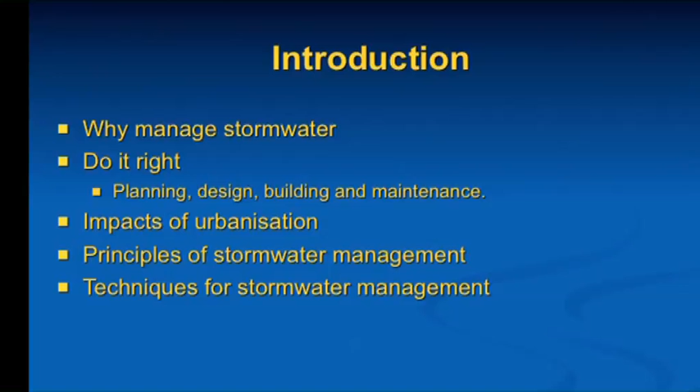Why we might want to manage stormwater, very briefly. Then a little bit about doing it right: planning, design, building and maintenance of stormwater drainage systems, stormwater management systems. In order to know what we're trying to achieve, we have to know what problems we're trying to address. So I'll talk a little bit about the impacts of urbanization, and then principles of stormwater management, and finally, what's probably of most interest to everybody is the techniques for managing stormwater. Some of them, not all of them by any means.

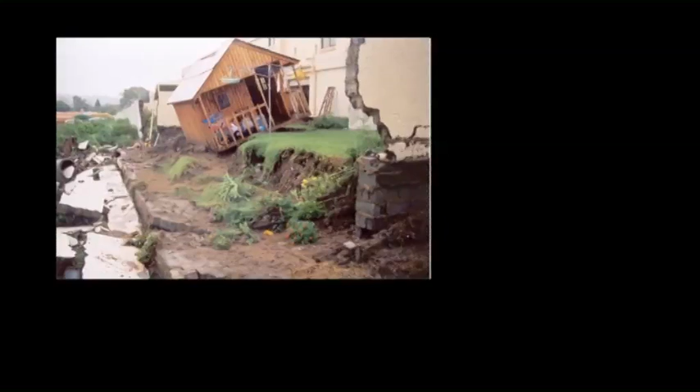All right, why might we want to manage stormwater? The obvious reasons are we want to avoid this sort of situation where the water gets out of hand and washes people's gardens and things away. This is an eroded donga just downstream of Vorna Valley. That's the Vorna Valley Spruit. It used to be a lovely rural catchment of Midrand. It's now an urban catchment of Midrand. Hence, the wetland that was up at this level no longer exists. And that's a bridge in the south of Johannesburg.

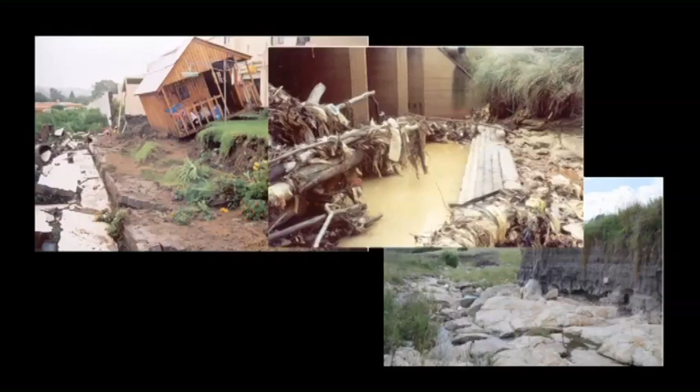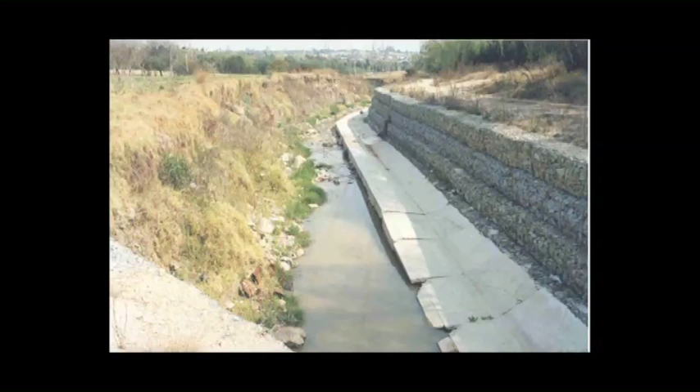Here, somebody's attempt at fixing a donga. What do you do when you have dongas to fix? You stick gabions in them. But in this instance, they stuck gabions down the one side, forgot that rivers erode on both banks, and also tried to go a bit deeper. So we have a gabion wall, a lovely little concrete channel, and the stream flows down the bottom of it. So, how was this fixed?

That's at the bottom of Sandton Drive, where Sandton Drive joins William Nicol. It was Sandton Parks. It wasn't Joburg City Parks. They planted some trees along the side so you couldn't see it from the road. And then they put a picket fence, which is now covered in bugweed, and now you definitely can't see it from the road.

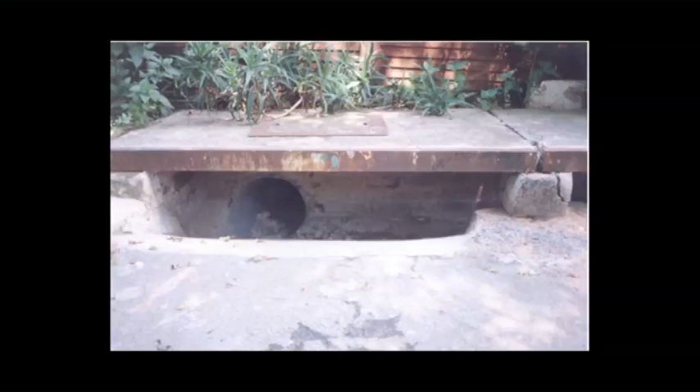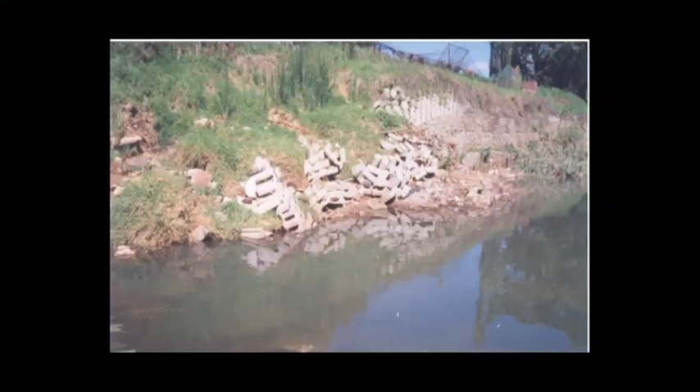And then this is a technical thing. Why do you think the person who designed this fancy outlet with this tiny little pipe at the bottom really and truly believed that it had to have such a big mouth? I'm not sure, but do it right. And if you're going to build it, also build it right and try to make sure that it stays there. You really don't want this to happen. Down on the Braamfontein Spruit below Pirates, that was a Loffelstein wall that didn't have a proper foundation, so the Loffelsteins are now going to Hartbeespoort Dam slowly.

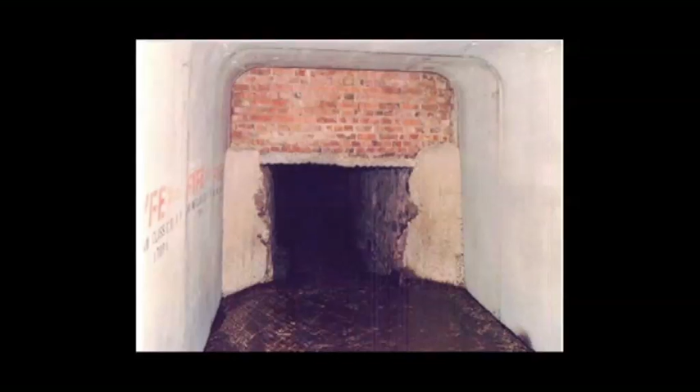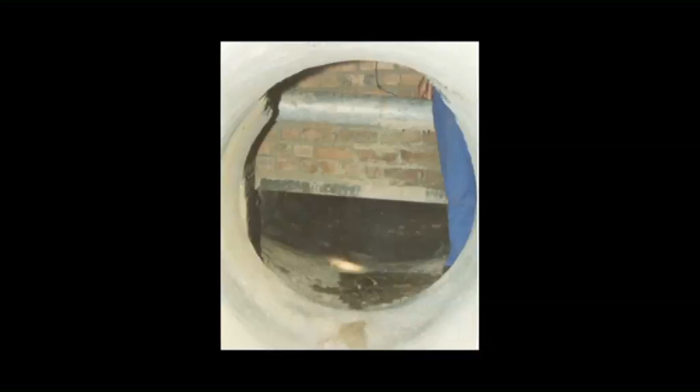This view is looking downstream in a culvert. I'll talk about where you start stormwater management and stormwater drainage facilities, but you don't actually build a great big one and then hope that the water is going to find its way into a little culvert at the bottom. It doesn't work too well. This is looking downstream in a stormwater pipe where somebody got their planning wrong, or maybe they didn't. They just came afterwards and decided they needed an electrical conduit through the stormwater drain. So we have this clean, great stormwater pipe and a box. So that pipe doesn't work too well either.

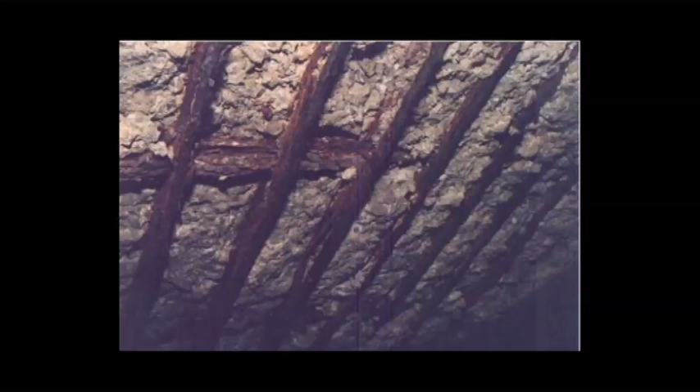If you're going to canalize rivers, you really do need to do something about maintaining them. So scour holes are not great, because they end up in bank failure and that costs maintenance. And this finally, this is quite an interesting problem.

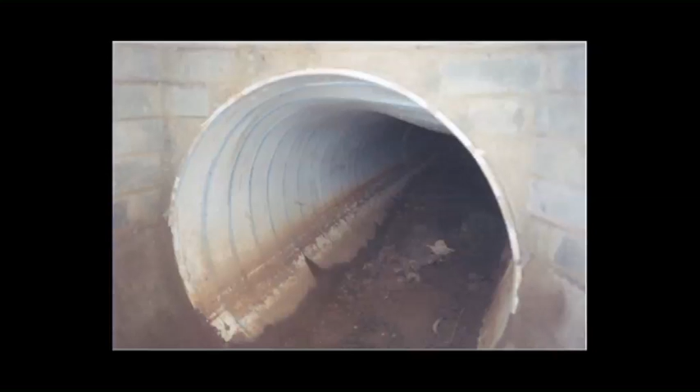That is a thin-walled plastic pipe. It's a structured walled plastic pipe. It comes in a roll, and as you want to make a pipe, you actually roll the thing out and it clips together with a little edge like that, and you end up turning your plastic strip into a pipe. But it's got an effective structural thickness of about 8 millimeters of plastic. Now, somebody took a 900 pipe and they buried it under 2 meters of soil, and they thought, because somebody told them something, it was going to work.

When I say do it right, it doesn't only mean build it right. What I mean is also manage it correctly. What happened here, the consulting engineer had designed a concrete pipe. Concrete pipes are expensive. The contractor went along to the developer and said, I've got a much cheaper plan. I can do it with this cheap plastic pipe. And the developer said, well, if it works, of course, let's do it. So the consulting engineer was overridden.

And this plastic pipe, I don't know whether you can see the top there, it's just quietly collapsing into itself. The consulting engineer was the first line of attack. You let us build this thing. Guys, everybody needs to be sensible about what they're doing. So this kind of mistake can be quite embarrassing.

But what are we trying to achieve? We're trying to manage the impacts of urbanization on stormwater, the effects that storms have on the catchment. What does urbanization really do? First of all, we know you get an increase in imperviousness. Everybody knows that. We've got roofs, we've got driveways, we've got roads, we've got parking areas, and the rainwater that hits those surfaces runs off in a hurry. Nothing goes into the ground, and we have this increase in runoff.

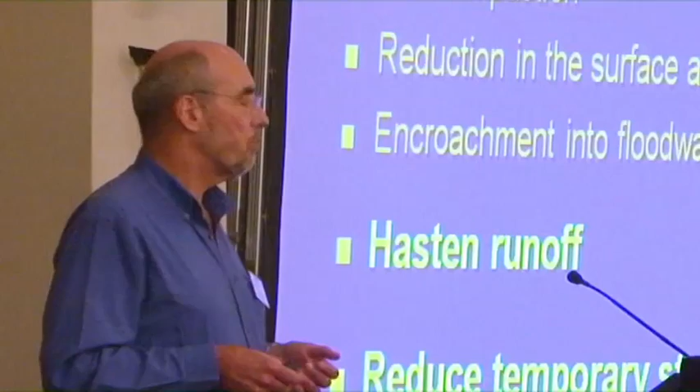In order to accommodate that extra runoff, what do we do? We build efficient drainage systems, which speeds the water up even more. Because the system is more efficient, it responds to shorter, more intense storms, and you get this sort of vicious circle. The more intense storms you have to deal with, the more efficient systems you have to build. And so your systems are perpetually becoming undersized. Similarly, we have to canalize our water courses because we've got increased runoff and the water courses are being damaged. Again, it makes the system that much more efficient.

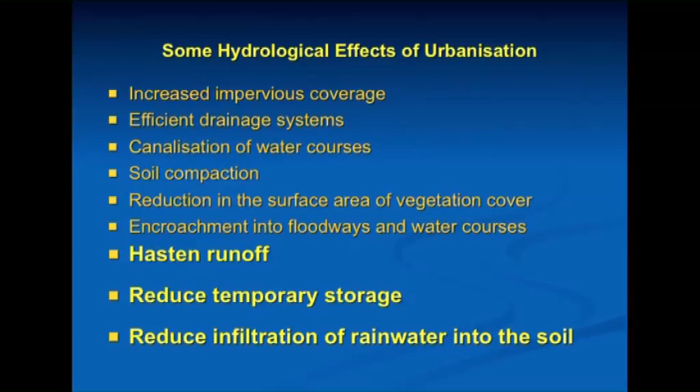And then the hard one, soil compaction. We say, but we've got open spaces, we've got gardens, we've allowed for these median islands in roads. Why aren't they working? Why aren't they absorbing the water? It's actually quite simple. A natural soil is not a homogeneous mass. It's got voids, it's got macropores, which were animal burrows, old root channels and things like that. Not root canals, that's a bit painful. And those soils have an amazing capacity to absorb water.

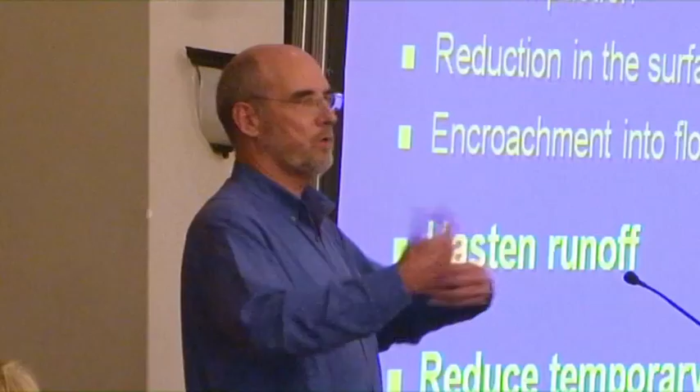But when we build anything, the first thing we generally do is clear the site and compact it, and then we go and plant something afterwards. That changes the structure of the soil, and it reduces its permeability by probably a half, probably even more than that. So just providing open spaces within our developments doesn't necessarily mean that the soil has the capacity to absorb the water. You need to help that.

Reduction in the surface area of vegetation cover. Leaves take an enormous amount of rainfall to wet them. By taking the vegetation out, you increase the runoff. Encroachment onto the floodways, of course, takes the storage out of the system. What do these all do? They hasten the runoff, they reduce temporary storage, and they reduce the infiltration into the soil. And then some quality effects of urbanization. We increase the point and diffuse pollution sources. The failure of the wastewater drainage systems, we've all seen it.

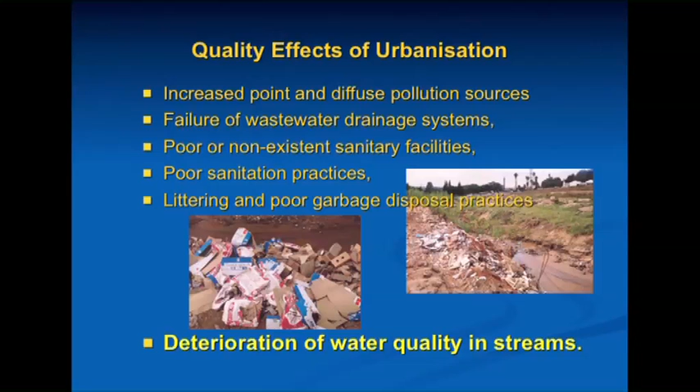We've all seen the poo sewers all over the place. Poor and non-existent sanitary facilities. You know, probably the grossest thing that I've seen in a long time is the sanitation system in Khayelitsha. They tried to build a vacuum sewer system, but for whatever reasons, it doesn't work.

So the sanitation system there consists of paint tins and Checkers bags, plastic bags. In each one of the little shacks is a paint tin and a Checkers bag that gets used for the night. In the morning, the bag gets tied up and it gets tossed out with the garbage put next to the skips. And of course it gets picked up by the stormwater drainage and down it goes into the rivers.

Impacts of this: increased frequency of runoff. Why is frequency of runoff an issue? We know that we can have wetlands sitting on very, very steep slopes in rural catchments, 3%, 5%. I've seen wetlands probably sitting on a 10% or more slope on the side of the hill in Etala. The reason that they can exist is because surface runoff over those areas occurs very seldom, maybe once a year, maybe once in every couple of years.

And so in between those surface runoff events, the vegetation has time to reestablish. It might be damaged, there might be a bit of erosion, but in a year or two, the vegetation is reestablished. What do we have when we have impervious surfaces and it rains? 2 millimeters of rain is all it takes to start runoff from a road. So every single time it rains, boom, the river gets hit. Hydrograph comes down, the vegetation hasn't a hope. So increased frequency of runoff is probably one of the worst, most insidious causes of damage in urban drainage systems.

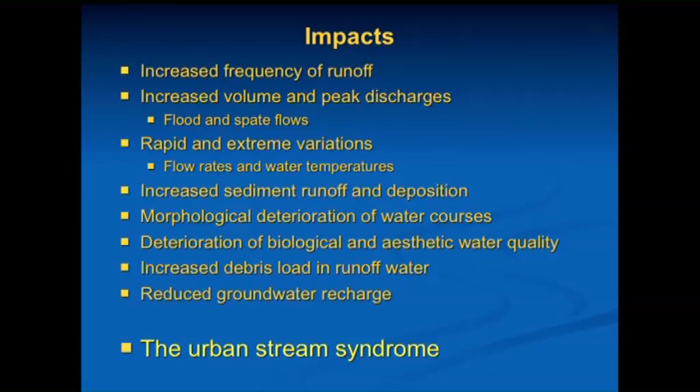Increased debris load in runoff water. We see that, and I showed you a picture of that. And of course, the reduction in groundwater recharge. All of these things come together as a set of symptoms and result in a thing called the urban stream syndrome, the deterioration of a watercourse. I showed you that one picture of the river at Vaughan Valley suffering from exactly that.

All right, some consequences that we feel in society. There's an increased hazard. Every summer we hear of people who drown, mainly because of a lack of appreciation of the power of the water, a lack of appreciation of how quickly the water level can rise in a river. Increased flood hazards speak for themselves. Exposure of new developments to flood hazard speaks for itself. Loss of function and stability of hydraulic structures speaks for itself. Threat of dams, blockage and failures, all of those things speak for themselves, so we won't go into them.

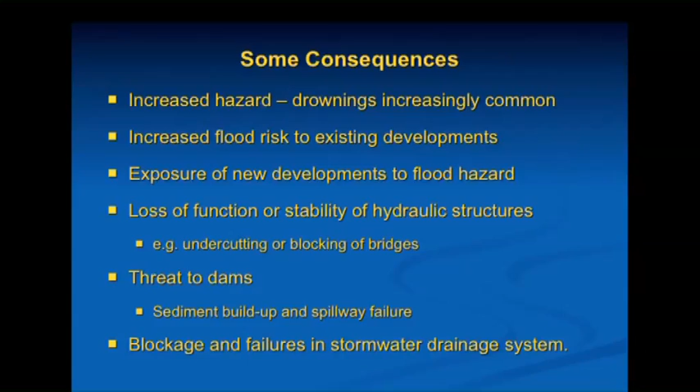More consequences though. Loss of a recreational amenity of watercourses. People are not really interested in dangling their feet over the edge of a 3-meter high vertical sided donga. So they write them off. We see increased public health risks. Even where we create water bodies, people will come into contact with that water, and you can't really stop them. So if you create a water body, somebody's going to swim in it.

This is an urban stream in an urban lake in Soweto. I hate to think what's in that water, but the kids are quite happy playing in there. If we're going to create water bodies that people have access to, we have an obligation to make sure that those people are safe in those water bodies.

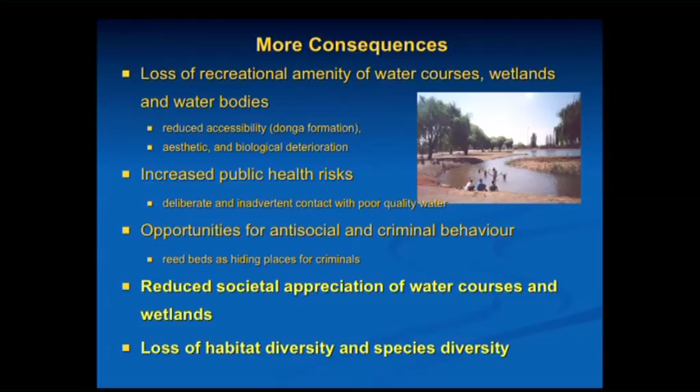And the result of that, of course, people lose an appreciation of the watercourses and water bodies, and if they lose an appreciation, they're no longer interested in maintaining them, and again, we have this vicious circle. If you can't maintain a stream that works, then why should we be interested in it? And if we're not interested in it, why should we pay you to try to maintain the stream in a state that works? So what do we do?

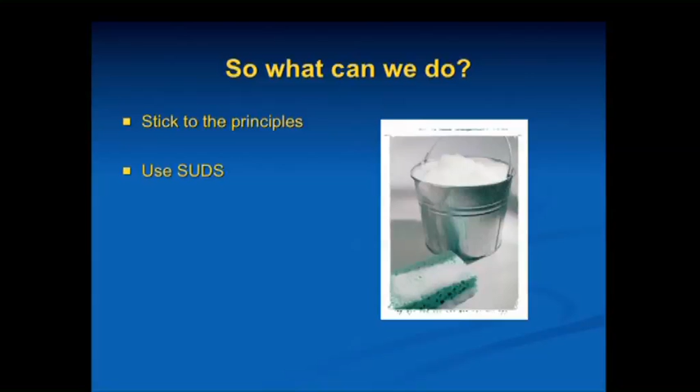We use SuDS, and we stick to the principles. The principles, and I'd like to go through these quite quickly because some of them are quite important. Understand that drainage is a regional phenomenon. It doesn't respect boundaries. It doesn't respect political boundaries. It doesn't respect property boundaries. The only thing that water knows about is running downhill. Right?

Every urban drainage area has two systems, whether they were designed or not. We have a piped system or some sort of little stormwater management system, and then we have the floodways. Water will find its way downhill; whether it has to go through somebody's lounge to do it, it will find its way downhill.

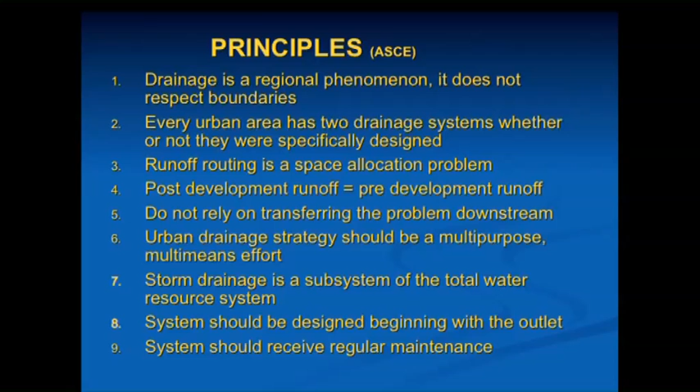Runoff routing is a space allocation problem. You need to allocate space to water. Water has a volume. You can't compress it. You can't do anything with it. You've got to let it flow down the hill. Right. And don't rely on transferring the problem downstream. It was the old engineering way of doing things. Put it in a pipe, get it to the river as fast as possible, it'll go away.

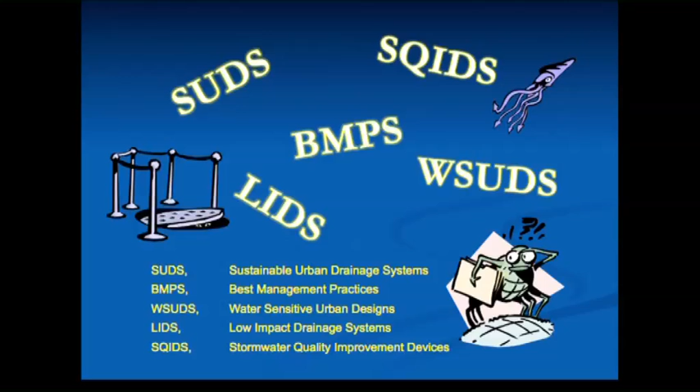So what do we use? As I said, we use SuDS. SuDS, SQIDS, BMPs, LIDs, WSUDs. You hear all of these things. You hear in a meeting, we're going to use SuDS. And somebody says, well, SuDS are so last year, we're going to use WSUDs, or we've got a brand new SQID. They all mean basically the same thing, unless you're an American, in which case you use best management practices, far superior to SuDS, SQIDS, or anything else. But they're all the same stuff, really and truly within small parameters.

So what kind of SuDS? What is the purpose of a SuD? Really, all we're trying to do is recreate the natural processes. Infiltration: we're trying to give the water opportunities to infiltrate into the soil, and that reduces the volume of runoff, and it reduces the peak discharges as well. We're trying to give the water opportunities to evaporate, so we're trying to recreate evapotranspiration areas, planted areas and things. We want to store the water, so we create storage, detention facilities, retention facilities, and that reduces the peak discharge. It can, in certain instances, reduce the volume of runoff as well.

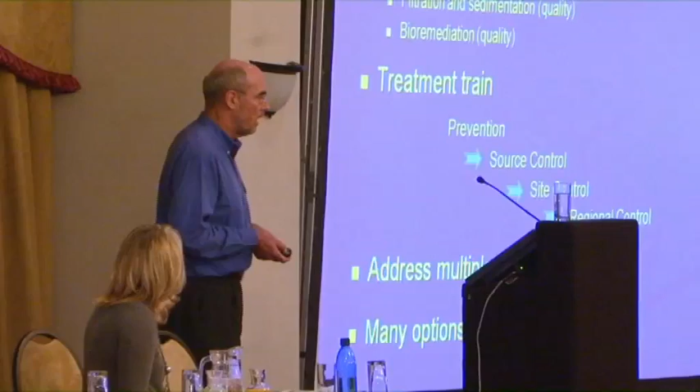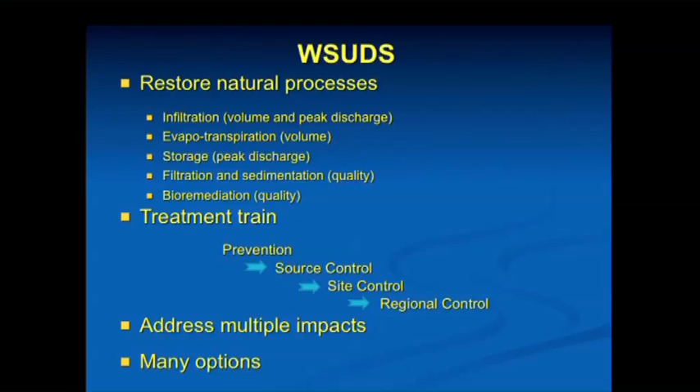We're looking to improve the water quality. So we want to trap some of the sediment. We might want to filter out some of the finer material as well, and we want to expose the water to bacterial activity and plant activity to take out some of the nutrients and possibly some of the heavy metals as well. So we have bioremediation facilities, and they work as a treatment train.

First of all, let's try to prevent the runoff. So let's try to reduce soil compaction in our open areas, and let's try to have as many open areas disconnected from the drainage system as possible. That prevents runoff. Then source control. Let's try to store the water on the roofs of buildings if at all possible. The roof of a building is an amazing storage opportunity.

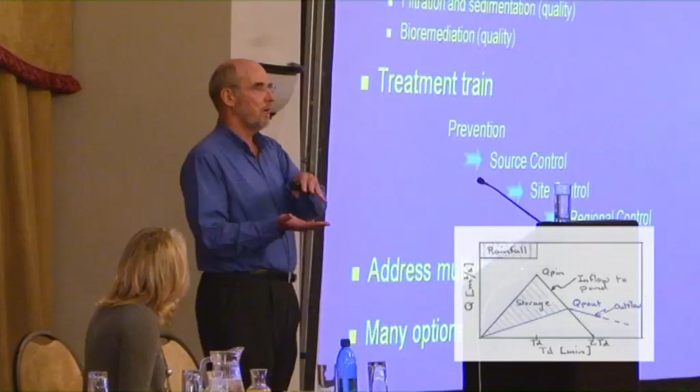I told you I've got another number for you. The normal structural design load for an accessible roof is 2 kilonewtons per square meter, which corresponds to 0.2 of a meter of water. The 24-hour, 50-year rainfall over most of this country is 0.15 of a meter of water. So if you store the water on the roof of your building, you can store the whole rainfall for 24 hours that would occur once in 50 years. We ignore that, but it's there.

If we can't control the runoff at source, we try to control the runoff on the site. And if we can't control it on the site, then some cities maybe have regional stormwater runoff control facilities. The idea is to address multiple impacts in a single facility. So if you can address quality, runoff volume, and peak flow all in the same facility, that's great. And of course, there are very, very many options, ways of doing this.

Stick to the standards first and foremost. There are standards for stormwater management, and you need to stick to those. Engineers will tell you you can't move away. We've all heard that. Engineers are the boogie people. First of all, the safety standard.

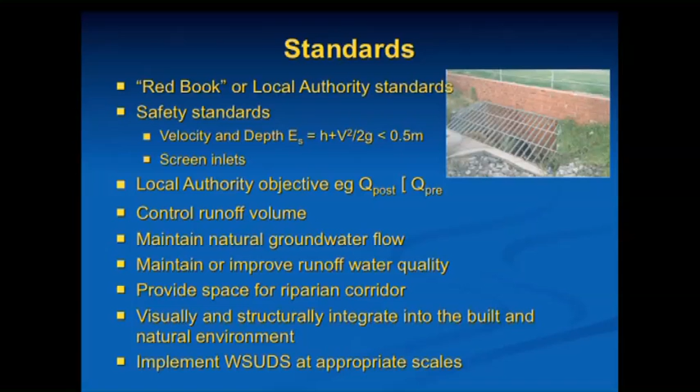Be aware of the power of flowing water. Water flowing at 3 meters a second, now that's pretty much a jogging pace, has a wave height of 0.5 meter. So if you have a stream of water which is flowing ankle deep, and it's flowing at 3 meters a second, when you step in it, the wave hits you on your hip. And if it hits you on your hip, you're probably going to fall over, and then you will roll down the water course.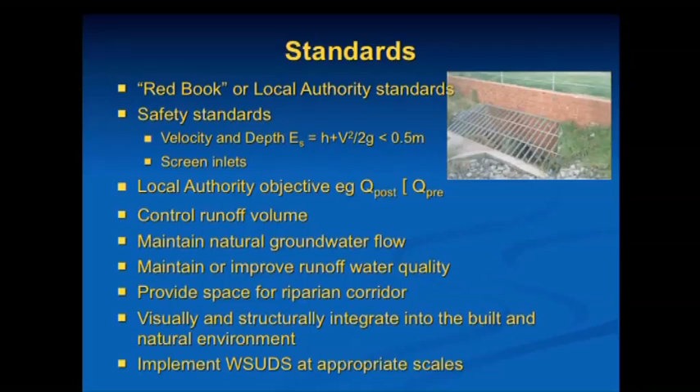Other standards, local authority objectives, try to keep the post-development peak discharge equal to the pre-development peak discharge. That's what the City of Johannesburg's standard is. The City of Cape Town is going a step further and saying, not only do we keep the peak discharge the same, but we also try to keep the post-development quality the same as the pre-development quality. Storage: Q out is equal to Q in minus change of storage. That's the equation I was going to give you.

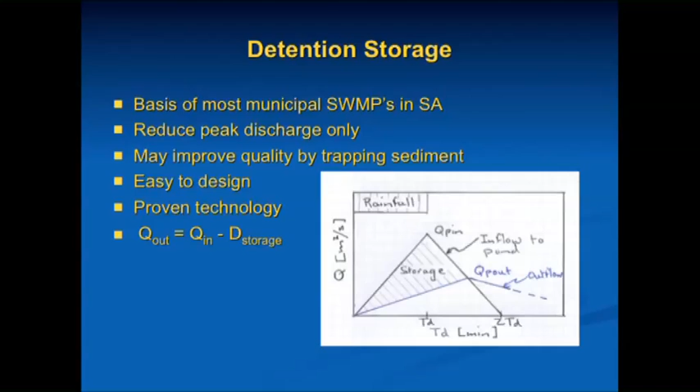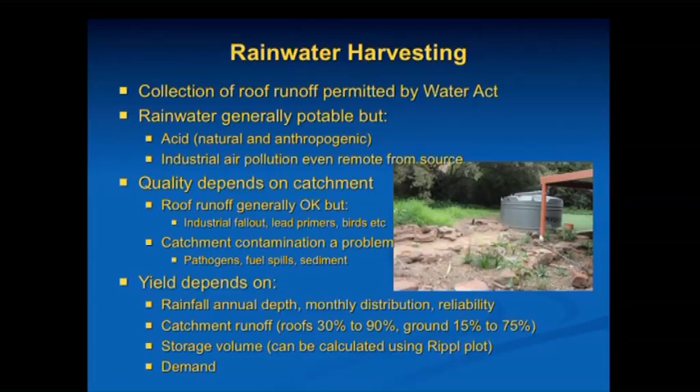Rainwater harvesting, you can harvest rainwater very successfully. You're entitled to harvest rainwater according to the Water Act. It specifically says you can, right? Be careful of it. Quality of rainwater is generally quite good. It's a little bit acid because it's in equilibrium with the carbon dioxide, but it's not too severe. Be careful if you're retrofitting old buildings, because they used to use a lead primer on the galvanized roofs. You don't really want to feed too many kids lead. It's bad for their brains. Okay. The yield, you can go into this.

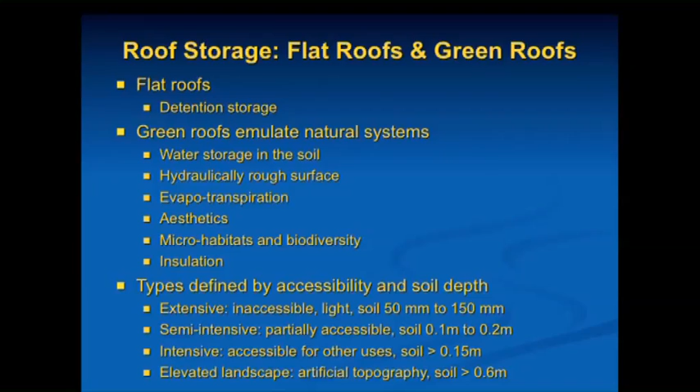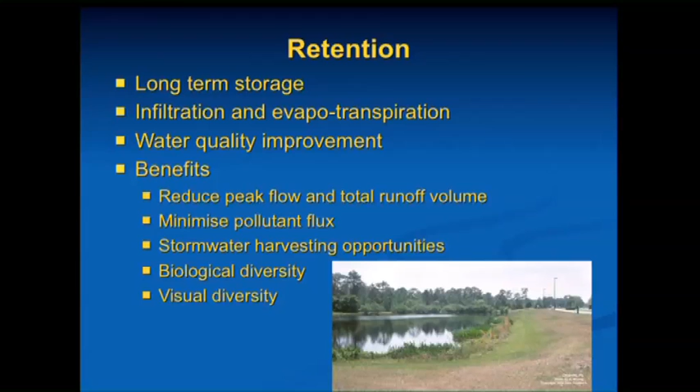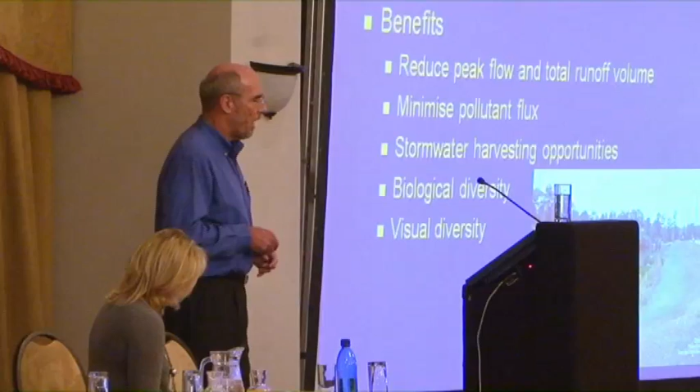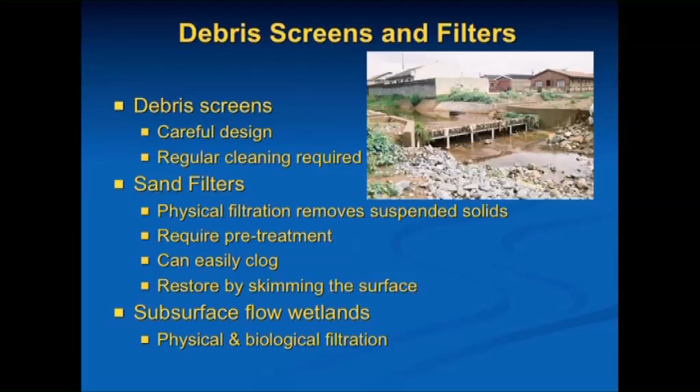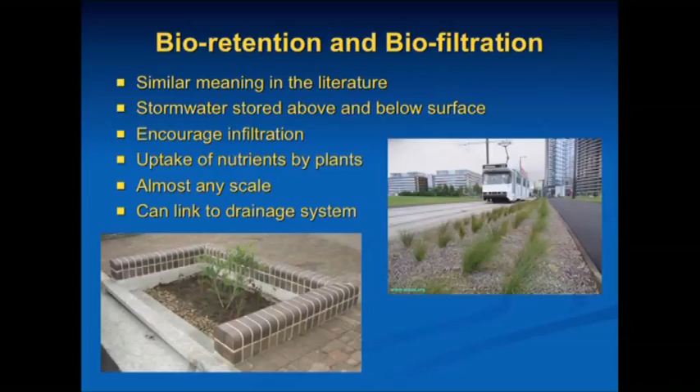Debris screen. Okay, sorry guys. I just wanted to tell you about this opportunity very quickly. Instead of having a curb inlet which goes straight into a pipe, build a curb inlet that goes into a tree bowl. Put some stones in the top 300 millimeters of your tree bowl, and then take the excess water into the pipe. The first couple of millimeters of water will go to irrigating your tree. You'll get benefits in biofiltration, bioretention in the tree bowl. It works very well, and it can work as urban furniture as well.

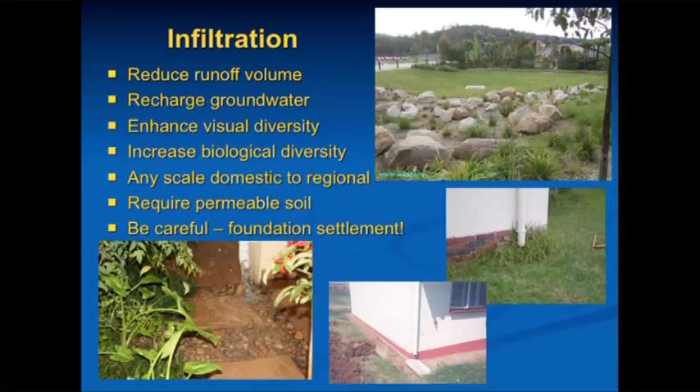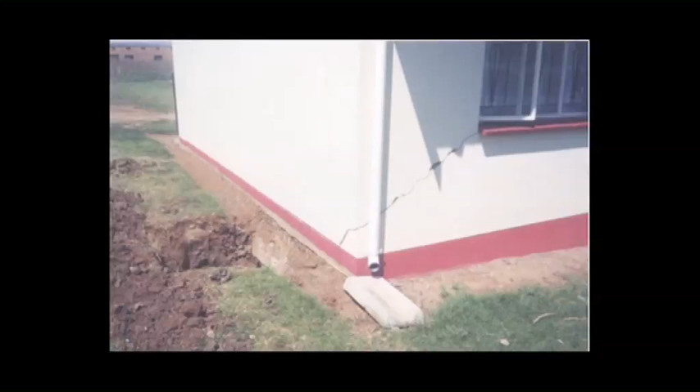Infiltration, at whatever scale you like. That's a regional infiltration point in Australia. This is the bottom of Neil Armitage's garden. This is my own garden with a little infiltration facility next to the front door. And this is what happens if you try to infiltrate stormwater next to a foundation on collapsing soils. You break your house. So you can't use the same system for each thing. There's no panacea. You've got to choose what's appropriate for the site.